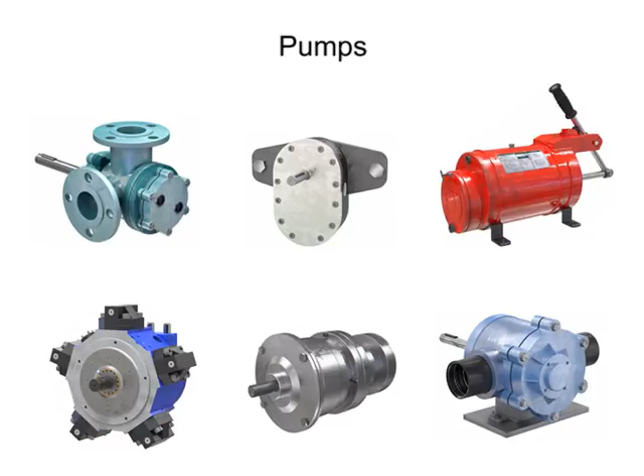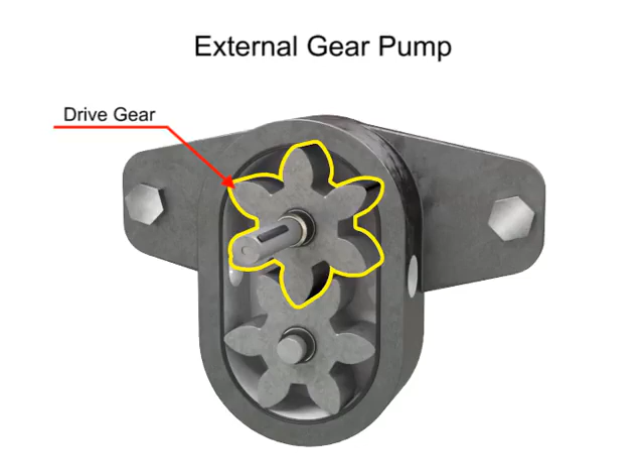An external gear pump uses two gears rotating against each other to provide fluid movement. One gear, driven by a motor connected to a shaft, is called the drive gear because it is driven by a motor, and it in turn meshes with and drives the movement of the second gear.

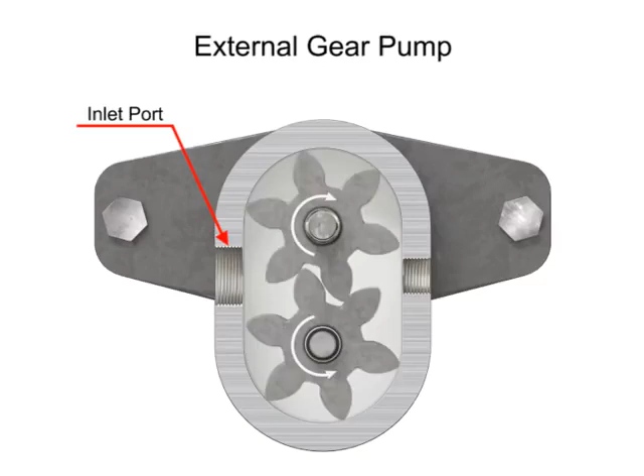As the gears rotate away from each other and come out of mesh, they create an expanding volume on the inlet side of the pump. This creates a vacuum at the inlet port, allowing fluid to flow into the pump. Then fluid flows into the cavities and is trapped by the gear teeth.

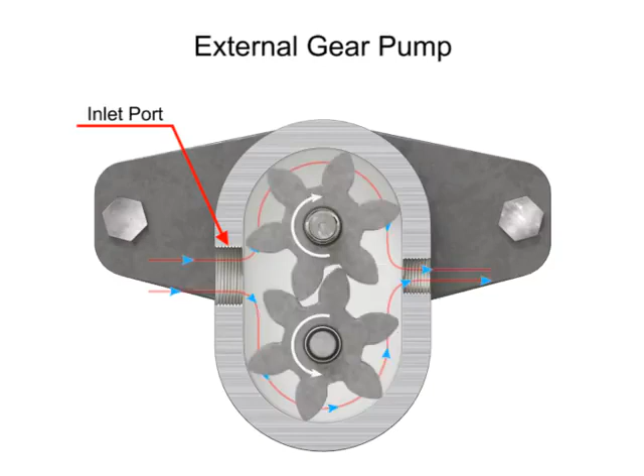As the gears rotate, a flow path is created around the outside of each one. Fluid trapped in the slots between teeth is carried around and discharged into the cavity with the outlet port. Meshing of the teeth in the center of the pump seals the outlet port from the inlet port. No fluid passes between the gears.

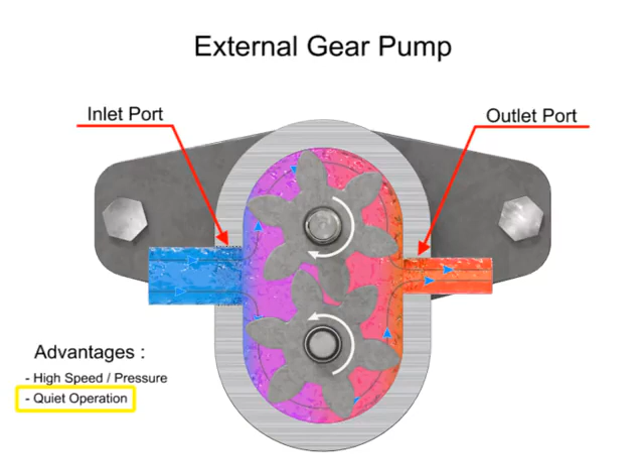The advantages of external gear pumps are their high speed and pressure, relatively quiet operation, and that their design accommodates a wide variety of materials. Disadvantages include bushings in the liquid area can become worn and that they have fixed end clearances.

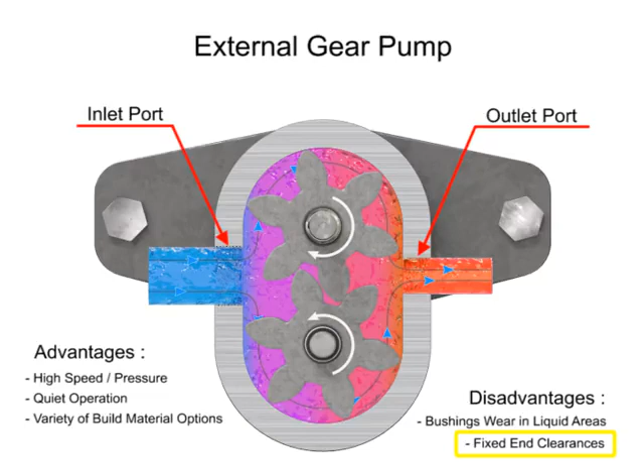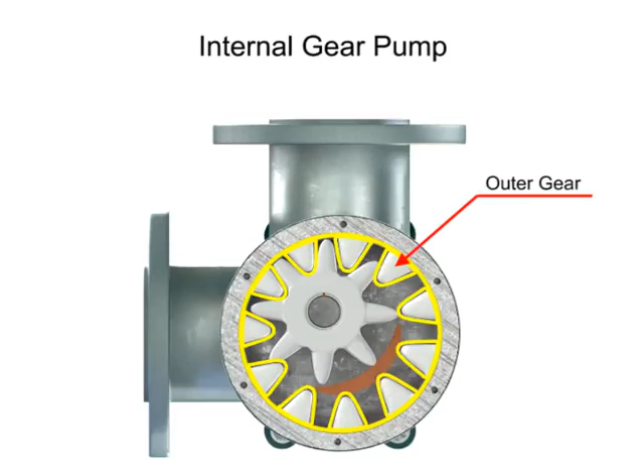Internal gear pumps are exceptionally versatile. This type of pump has one inner gear which is inside a second outer gear. The inner gear has a shaft driven by a motor and has teeth that protrude outward. The outer gear has teeth that protrude inward toward the center of the pump.

As the inner gear rotates, it meshes with and moves the outer gear. Liquid is trapped in the gear spaces and carried from the inlet to the discharge. A stationary crescent-shaped divider separates the intake and discharge portions of the fluid.

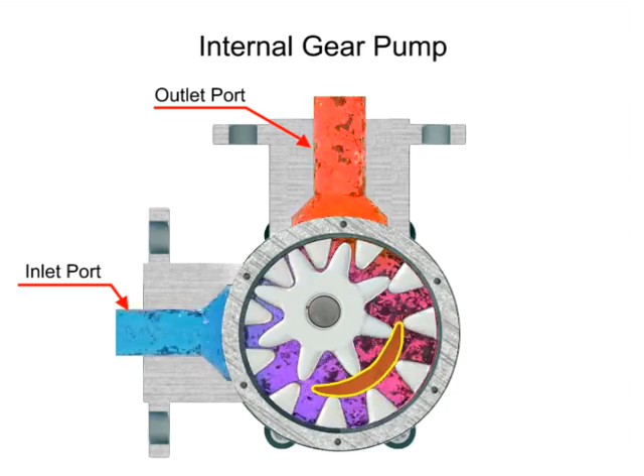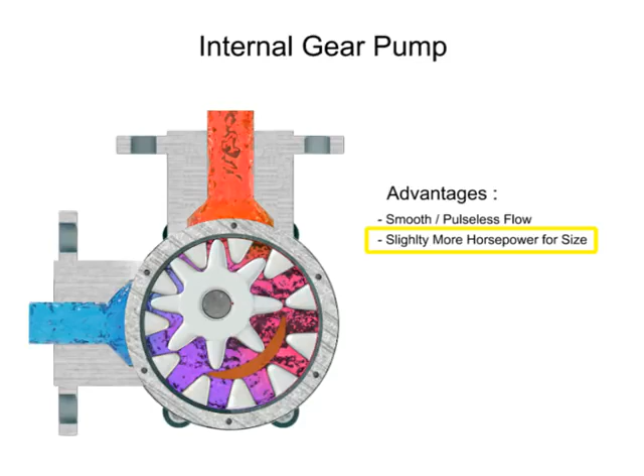Advantages of internal gear pumps are a smooth and almost pulseless flow, and slightly more horsepower for its size. Disadvantages are its higher cost, limited size range, low to moderate pressure ratings, and few sources of manufacture.

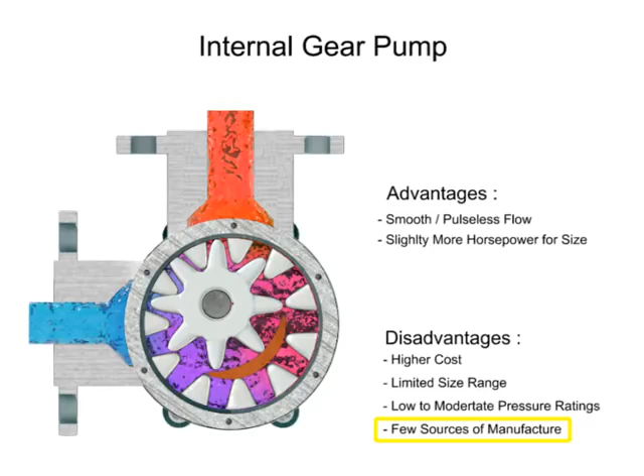A rotary vane pump is a positive displacement pump that consists of vanes mounted to a rotor. The vanes are on an off-center drive shaft. As the shaft rotates, the variable length vanes slide in and out to maintain contact with the pump housing. The tension in the vanes is maintained by either springs or hydraulic pressure. As the vanes rotate, they create chambers of varying sizes within the pump.

Fluid enters at the largest chamber. As the vanes rotate and retract, the chambers get smaller, forcing fluid to exit through the discharge port.

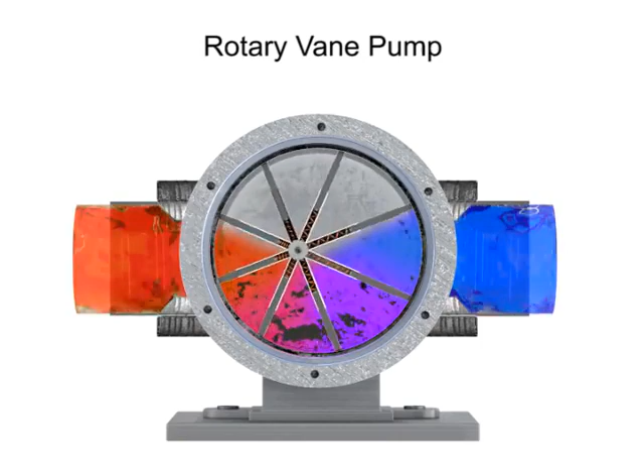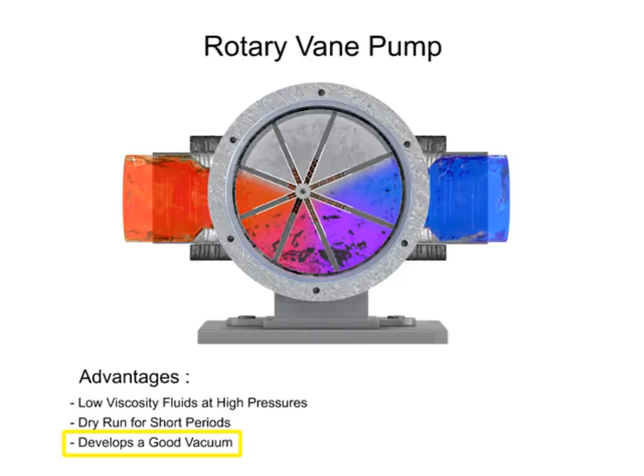The advantages of vane pumps are that they can handle low viscosity fluids at relatively higher pressures, can dry run for short periods, and develop a good vacuum. Their disadvantages include complexity and their unsuitability for both high pressure and high viscosity fluids.

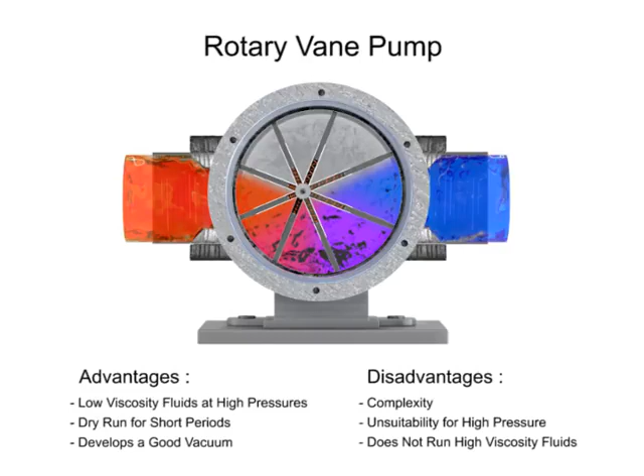Piston pumps come in many different forms. A swash plate is a device used to translate the motion of a rotating shaft into the reciprocating motion of a piston.

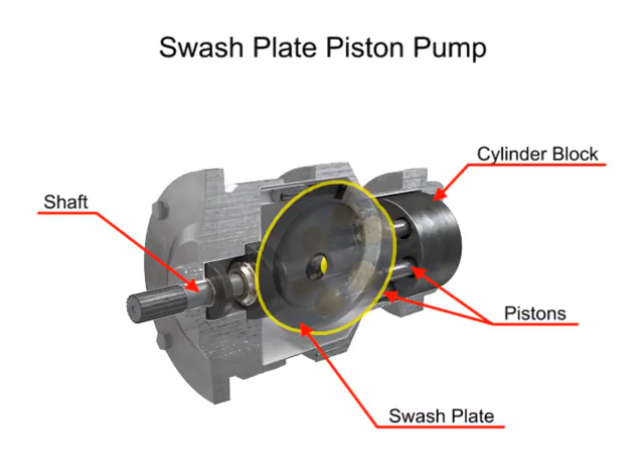Swash plate piston pumps have a rotating shaft connected to a cylinder block containing pistons, which are pressed against a stationary swash plate that sits at an angle to the cylinder. As the shaft rotates, the pistons move against the swash plate, causing them to reciprocate within the cylinder block.

The pistons create a vacuum that forces fluid in during half a revolution and expels fluid during the other half. On the intake stroke, a spring ensures the pistons pull back and maintain contact with the swash plate, causing fluid to fill the empty cavity left behind.

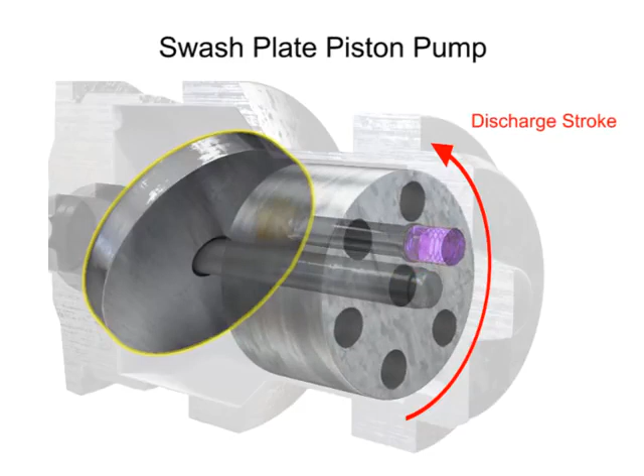On the discharge stroke, the angle of the swash plate forces the pistons back inside the piston block and discharges the fluid. The greater the slant on the swash plate, the further the pump pistons move and the more fluid they transfer.

Piston pumps, in general, are manufactured with closer internal fits than other pumps. This means that internal slippage can be less, so that they operate with reasonable efficiency at pressures both too high or too low for the operation of other pumps.

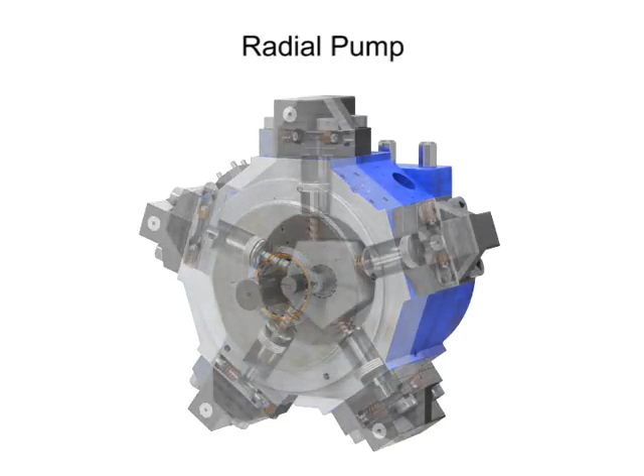Radial pumps are designed so the pistons stroke in a direction at right angles to the shaft. The pistons are arranged like wheel spokes around a cylinder block with an eccentric central cam mounted on a driveshaft.

As the shaft rotates, the cam moves towards the pistons, forcing them down into the cylinder block and discharging the fluid. As the cam moves away, springs help retract the piston and cause the intake stroke. Check valves ensure that fluid only enters the inlet ports and only exits the outlet ports.

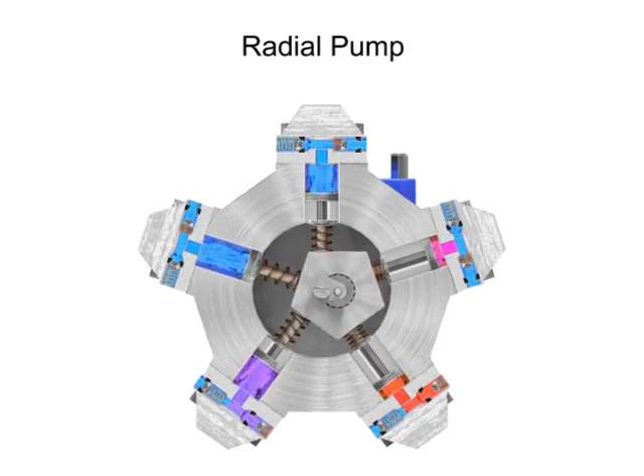Radial piston pumps have a low noise level, very high loads at low speeds, and high efficiency.

Hand pumps are used when a source of power is not available or where the extra expense of a power pump isn't warranted. For example, they are used on shop presses and other portable equipment, serve as standby pumps, and serve as sources of emergency power.

Hand pumps are always of piston type and are usually constructed with a piston working between two check valves.

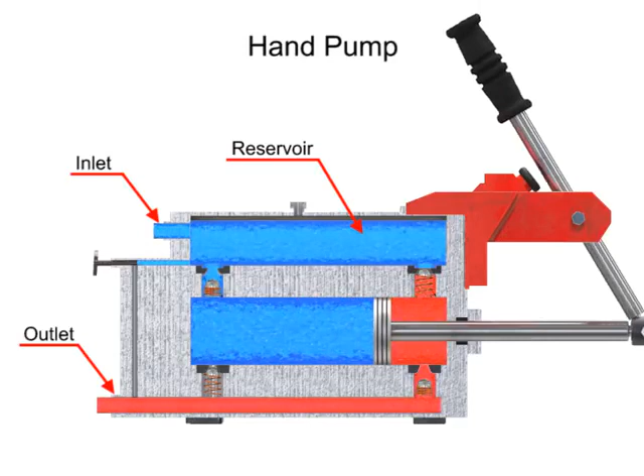Double-acting hand pumps are more efficient, allowing fluid to both enter and discharge on both strokes of the piston. Moving the pump handle in either direction allows fluid to be drawn in from the reservoir and discharged via the outlet ports. Check valves in all locations prevent fluid backflow.